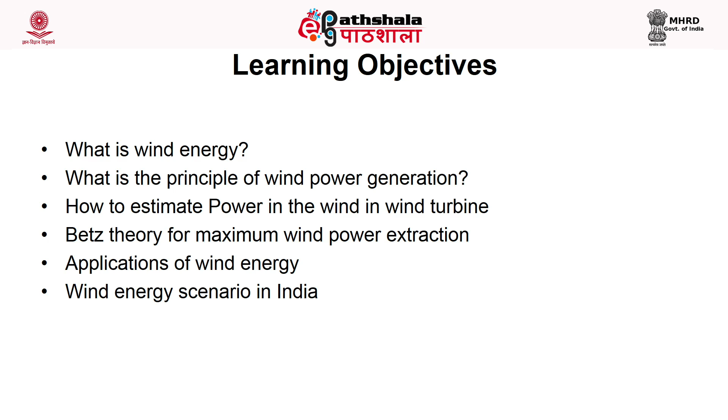So wind power is one of the indirect solar energy technologies. Wind is the air in motion resulting from the pressure gradient caused by solar radiation. About 2% of the solar radiation reaching the Earth's surface is converted to kinetic energy, and this is sufficient to meet the energy demand if we are able to harness it. The kinetic energy of the wind is utilized directly or can be converted.

The factors affecting wind generation of an area are the nature of the terrain, degree of cloud cover, and angle of the sun. Various factors that affect the distribution of wind energy are: mountain chains channelize the air currents; hills, trees and buildings act as obstructions and change the direction of airflow; and the frictional effect of the surface determines the wind speed. This is why wind speed is quite high at the seashore, as this frictional effect is less on the smooth surface.

Climatic disturbances resulting from rain affect the wind speed. Topography of an area also matters - for example, wind can speed up when passing through narrow gaps such as mountain gaps.

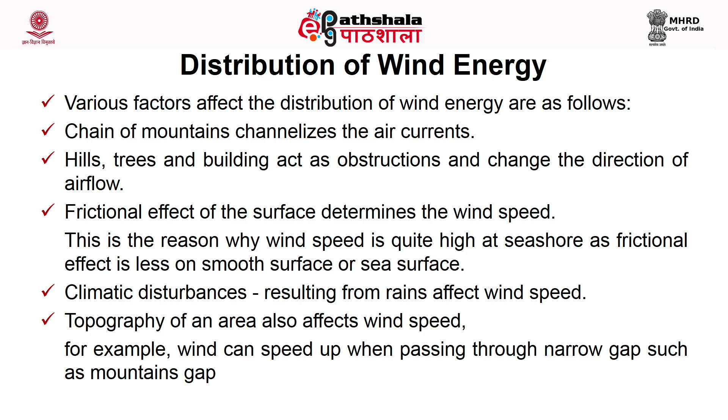Coming to the energy available in the wind: the windmill or wind system works on the principle of converting kinetic energy of the wind into mechanical energy. So we should know what is the energy available in the wind. As we all know, power is equal to energy per unit time, and the available energy can be equated to the kinetic energy of the wind.

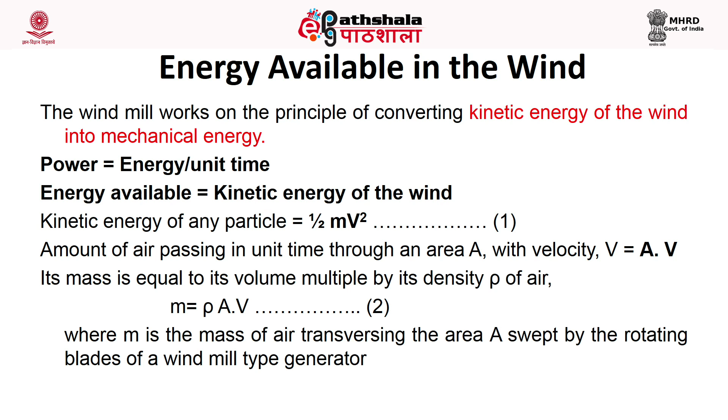Kinetic energy of any particle is equal to half mv square, where m is the mass and v is the velocity. Now the amount of air passing in unit time through an area A with velocity v can be calculated by multiplying the area with this velocity. Its mass is equal to its volume multiplied by density rho of the air, that is, density is equal to mass by volume. By applying that equation, we can equate mass as rho AV, where m is the mass of the air transversing the area A swept by the rotating blades of a windmill type generator.

Substituting this value of m in the kinetic energy equation, we get half rho A V into V square, which is equal to half rho A V cube watts.

The wind power available is proportional to air density, which is equal to 1.225 kilogram per cubic meter at sea level, and the variation in this air density over the year is around 10 to 15%. This may be because of changes in pressure and temperature.

The wind power is also proportional to the intercept area, as we have seen from the equation. So an aeroturbine with a large swept area has higher power than one with a smaller area. Since the area is normally circular of diameter d in horizontal axis aeroturbines, A can be equated as pi d squared by 4. Substituting this equation in 1 by 2 rho A V cube, we get the available wind power is equal to 1 by 8 rho pi d square V cube.

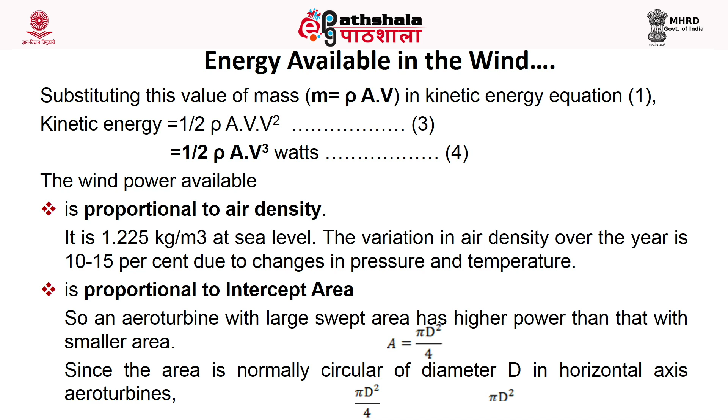Wind energy conversion system: the air circulation results from non-uniform heating of Earth's surface by the sun. The expansion of air occurs immediately above a warm area, which is forced upwards by cool, denser air that flows in from the adjacent area.

The energy in wind is due to this motion, and the energy is harnessed by a wind turbine mounted on a tower, with the speed of wind depending directly on this height. A tower height equal to or more than 30 meters is beneficial as it provides faster and less turbulent wind. The wind speed at a height of 10 meters is 20 to 25% higher than at the surface, and 30 to 60% higher at a height of 60 meters.

So, the optimum or the best height for the tower is more than 30 meters if you need to harness more energy. This is due to reduction in drag effect of the Earth's surface. The average wind speeds in a particular location need to exceed at least 6 to 8 meter per second for a small wind turbine to be economically viable. That means the optimum wind speed should be greater than 6 or 8 meter per second.

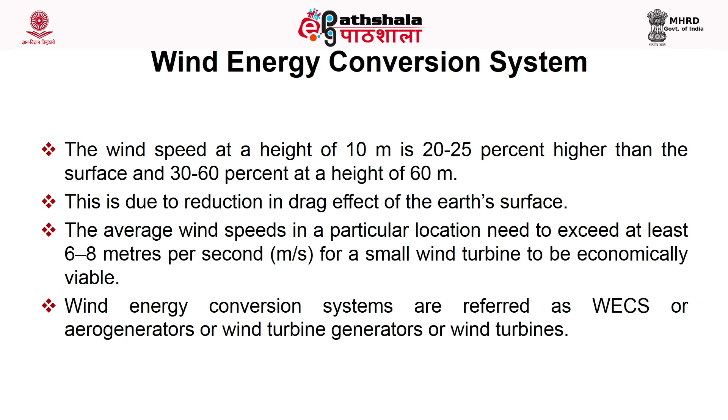The wind energy conversion system is also known as the aerogenerators, wind turbine generators, or simply wind turbines. Let's see what is the basic principle for wind energy conversion.

The basics are lift and drag forces. The extraction of power from the wind depends on creating certain forces and applying them to rotate a mechanism. There are two primary mechanisms for producing forces from the wind: lift force and drag force. The lift force acts perpendicular to the airflow while drag force acts in the direction of the flow.

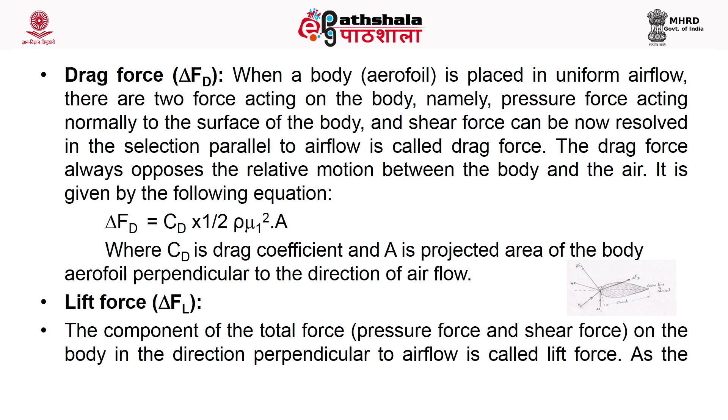Lift force is the component of the total force, that is pressure force and shear force on the body, in the direction perpendicular to airflow. This force tries to lift the body. It is given by the equation: delta FL is equal to CL, the lift coefficient, multiplied by 1 by 2 rho mu1 square A.

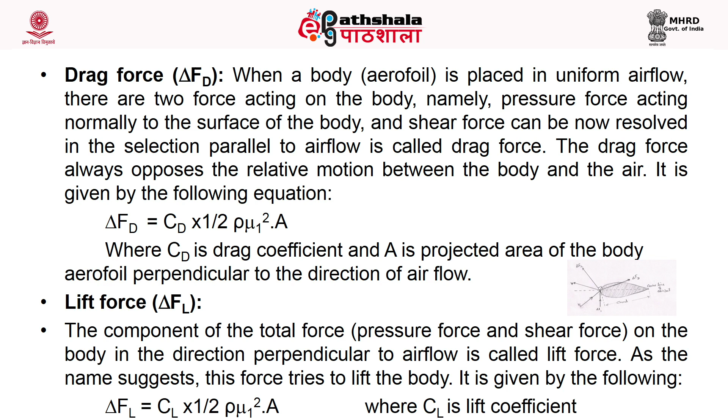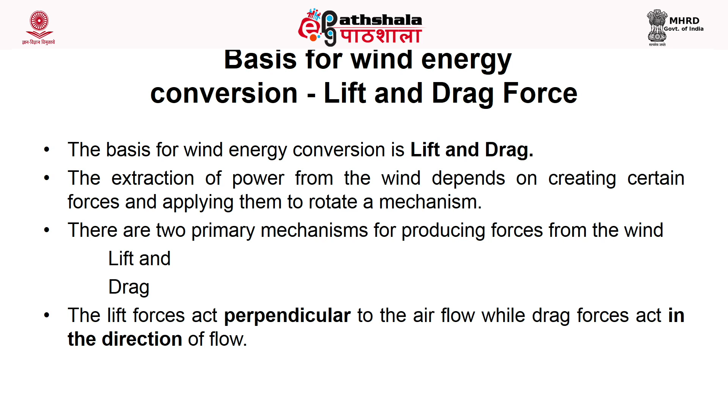Drag force: when a body or aerofoil is placed in uniform airflow, there are two forces acting on the body - pressure force acting normal to the surface, and shear force that can be resolved in the direction parallel to airflow. This is known as the drag force. It always opposes the relative motion between the body and the air, and is given by the equation delta FD is equal to CD, the drag coefficient, multiplied by 1 by 2 rho mu1 square A, where A is the projected area.

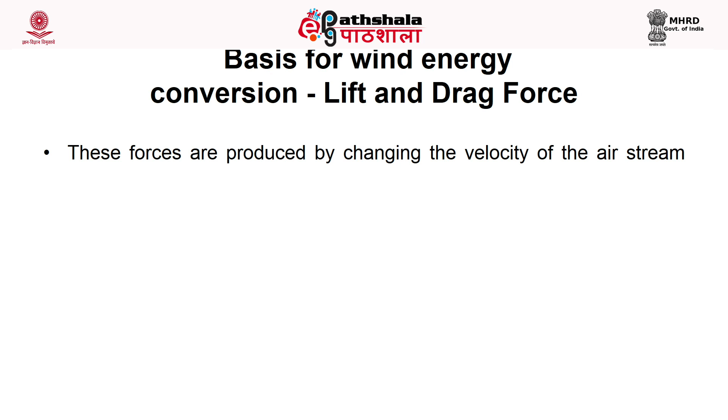These forces are produced by changing the velocity of the airstream flowing over either side of the lifting surface. Speeding up the airflow causes the pressure to drop, while slowing the airstream down leads to an increase in pressure. The change in velocity leads to a pressure difference across the lifting surface. This pressure difference produces a force that begins to act on the high pressure side and moves towards the low pressure side of the lifting surface, known as the aerofoil.

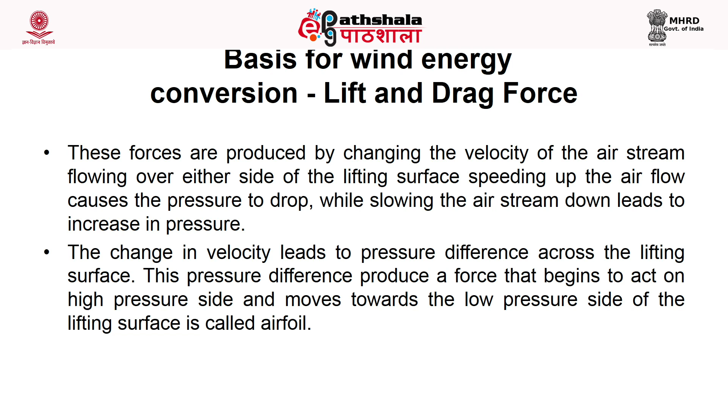Of these two forces, the lift force is good for wind energy harnessing. So what are the mechanisms for producing this lift? A good airfoil has a high lift drag ratio. The lift increases as the angle formed at the junction of the airfoil and the airstream becomes less acute, up to the point where the angle of airflow on the low pressure side becomes excessive. Due to turbulence, the lift decreases and drag force increases substantially - this is known as stalling.

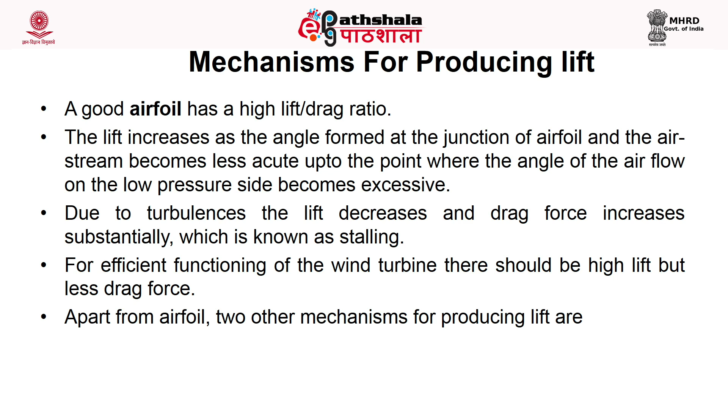For efficient functioning of the wind turbine, there should be high lift but less drag force. Apart from the airfoil, the two other mechanisms for producing lift are the Magnus effect and the Thwaites slot.

The Magnus effect is caused by spinning a cylinder in an airstream. The spinning slows down the airspeed on the side where the cylinder is moving into the wind, and increases it on the other side.

Air is blown through narrow slots in a cylinder and emerges tangentially - this is known as the Thwaites slot. This creates rotation of airflow, which in turn generates lift. So these are the mechanisms which help in production of lift force.

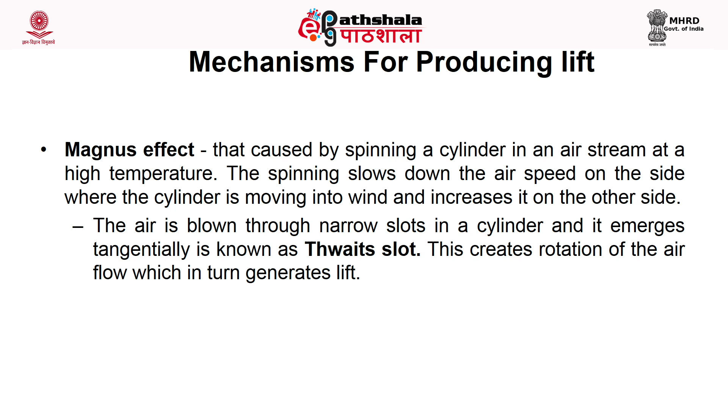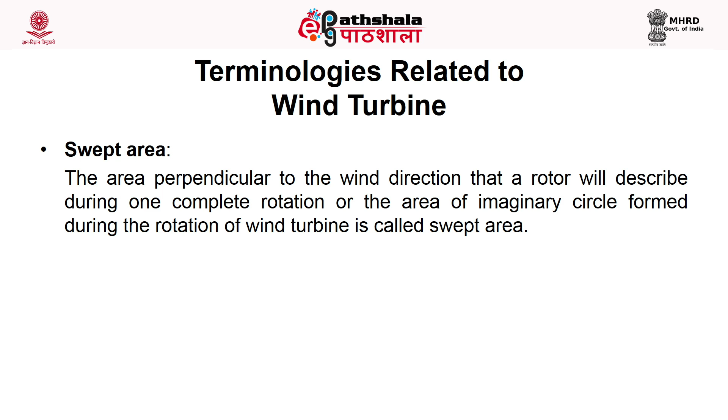Coming to the different terminologies related to wind turbines before seeing the principle behind it: Swept area is the area perpendicular to wind direction that a rotor will describe during one complete rotation, or the area of the imaginary circle formed during the rotation of the wind turbine.

There are different wind velocities. Wind velocity is the velocity of the free air stream at a sufficient distance away from the wind turbine, where there is no disturbance due to rotation of the wind turbine. Incident wind velocity is the velocity at which wind strikes the blade, and this velocity is always slightly lower than the free airstream velocity, mu0. The incident wind velocity is mu1.

Blade linear velocity is the velocity of the blade due to its rotation. If omega is the angular velocity of the blade and r is the length of the blade, then blade linear velocity is equal to omega multiplied by r.

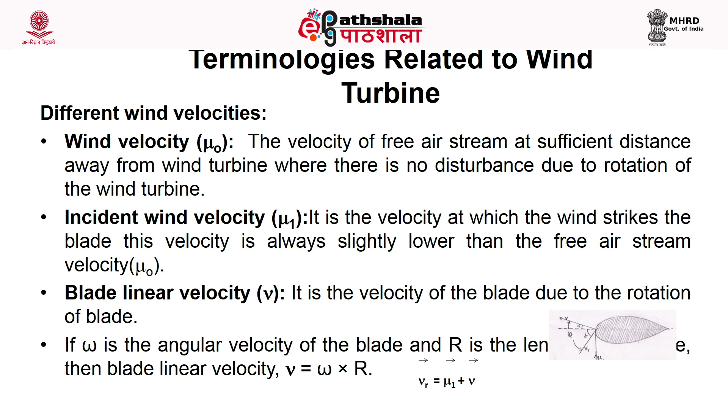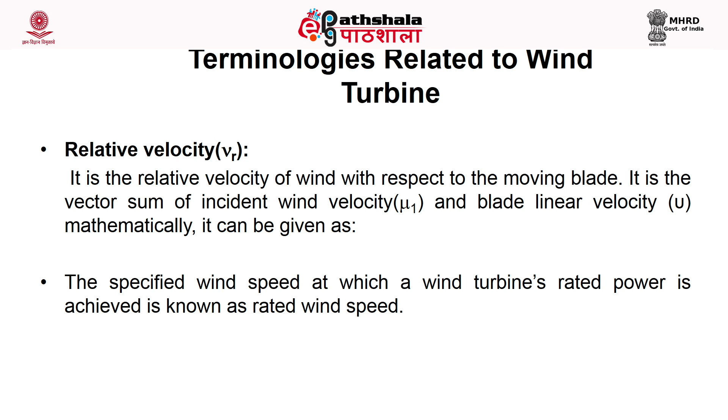Relative velocity is the relative velocity of wind with respect to the moving blade. It is a vector sum of incident wind velocity mu1 and blade linear velocity, as given by the mathematical representation here. The specified wind speed at which a wind turbine's rated power is achieved is known as the rated wind speed.

Survival wind speed or extreme wind speed is the maximum wind speed that a wind turbine is designed to withstand. You can see different velocities in this picture.

The angle of attack or angle of incidence, denoted by alpha, is the angle between the center line of the aerofoil, that is the blade cross section, and the relative velocity nu r. The airflow remains attached to the aerofoil for a small angle of attack, and the airflow is separated from the aerofoil for a large angle of attack.

The pitch angle or blade setting angle, denoted by gamma, is the angle between the center line of the aerofoil and the direction of linear motion of the blade. The output of a turbine is greatly influenced by blade pitch angle. The blade pitch control is a very effective way to control the output power, speed or torque of the turbine.

We have already seen the lift force and the drag force. There are other forces also, like axial force. The total force, that is the pressure force and shear force, can also be resolved along the axis of rotation of the blade and perpendicular to it.

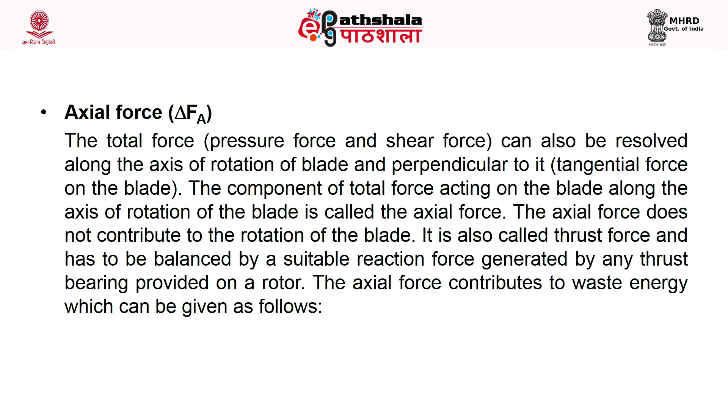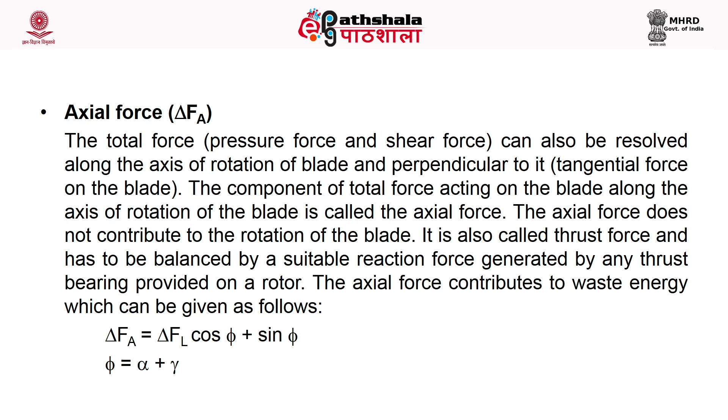The component of total force acting on the blade along the axis of rotation of the blade is called the axial force. The axial force does not contribute to the rotation of the blade. It is also called the thrust force and has to be balanced by a suitable reaction force generated by any thrust bearing provided on a rotor. The axial force contributes to waste energy.

It is represented as delta Fa, which is equal to delta Fl cos phi plus delta Fd sin phi, where the angle phi is equal to alpha plus gamma.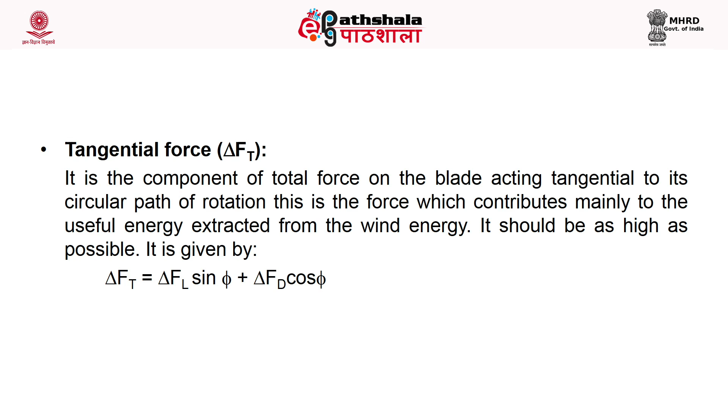The tangential force is the component of total force on the blade acting tangential to its circular path of rotation. This is the force which contributes mainly to the useful energy extracted from the wind energy, and it should be as high as possible. It is given by the equation delta Ft is equal to delta Fl sin phi plus delta Fd cos phi.

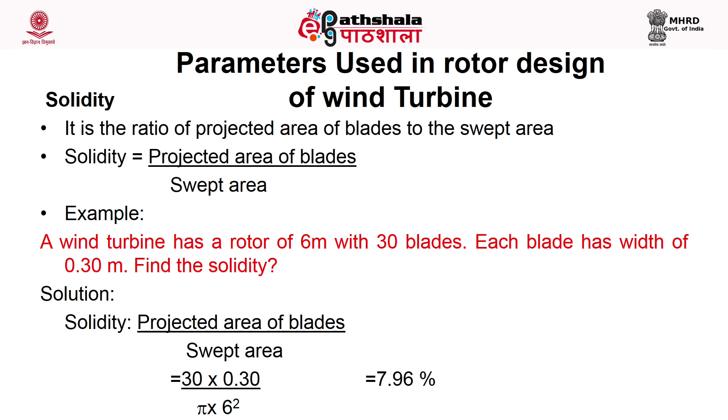The rotor of the wind turbine collects the wind from all areas swept by the rotor. The area swept can be considered as an airstream tube, which is continuously expanding air. This airstream model is also known as the Betz model of expanding air.

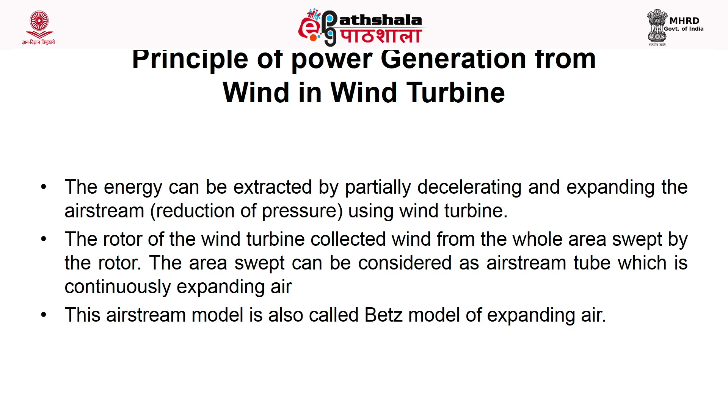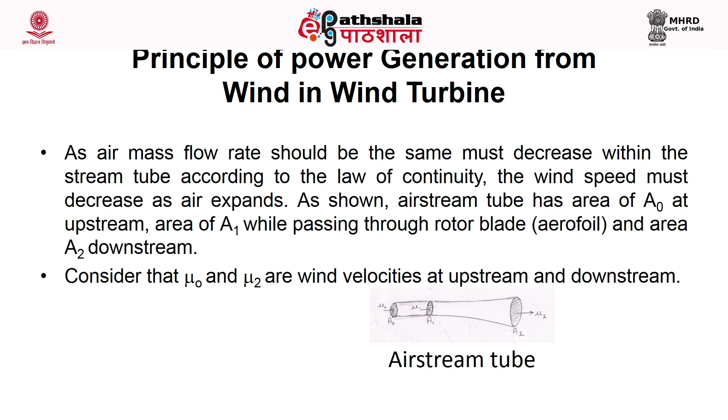Considering that mu0 and mu2 are the wind velocities at upstream and downstream, the velocity reduction from mu0 to mu2 means that there is reduction in momentum of wind as it passes through the wind turbine, resulting in a force being exerted on the blade of the rotor. It is given by the equation force F is equal to m into mu0 minus m into mu2, which can be written as F is equal to m into mu0 minus mu2, where m is the mass flow per unit time through the stream tube.

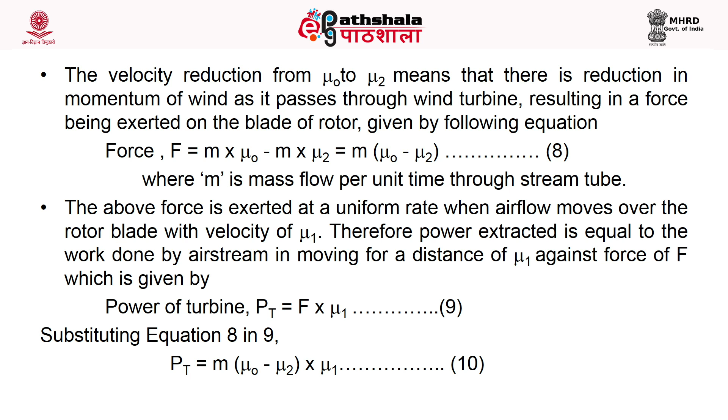The above force is exerted at a uniform rate when airflow moves over the rotor blade with velocity of nu1. Therefore, power extracted is equal to the work done by the airstream in moving for a distance of nu1 against force F, and it can be given by power of turbine Pt is equal to F into nu1.

Now substitute the F value, that is m into nu0 minus nu2, in this equation number 9. We will get Pt is equal to m into nu0 minus nu2 into nu1.

The power extracted by the wind turbine from the wind is equal to the change or loss of kinetic energy of the wind. So delta Ke is equal to Pw, which is equal to half of m into nu0 square minus nu2 square.

The energy extracted is equal to energy lost by wind. So the extracted is Pt and the lost is Pw. Equating these two values, Pt and Pw, we get m into nu0 minus nu2 multiplied by nu1 is equal to half into m into nu0 square minus nu2 square.

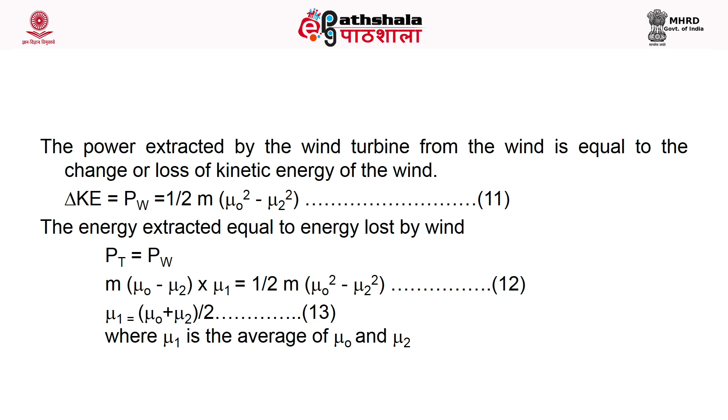From this we can calculate nu1 is equal to nu0 plus nu2 by 2, where nu1 is the average of nu0 and nu2. Substituting this value in Pt, we get Pt is equal to m into nu0 minus nu2 multiplied by nu0 plus nu2 by 2, which is half of m into nu0 square minus nu2 square.

The mass flow m is the product of area, velocity and density, represented as A1 into nu1 into rho, using the already calculated value of nu1. Substituting, we get m is equal to A1 into nu0 plus nu2 by 2 into rho. Now substitute this Pt value of half m into nu0 square minus nu2 square, and the m value A1 into nu0 plus nu2 by 2 into rho.

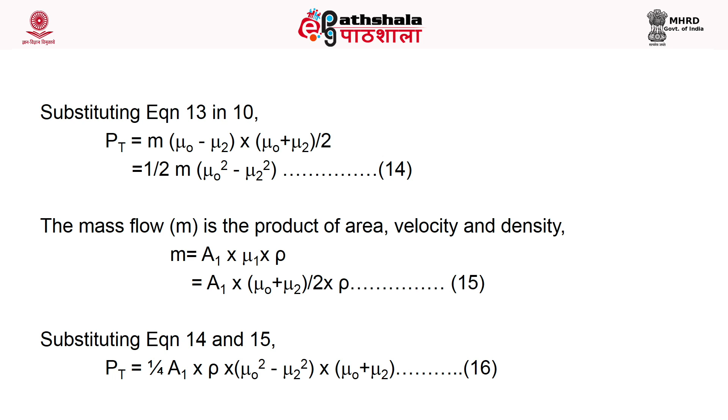We get Pt is equal to 1 by 4 into A1 into rho into nu0 square minus nu2 square, multiplied by nu0 plus nu2.

Let's assume there is an interference factor alpha present, then nu1 is equal to 1 minus alpha into nu0. So alpha is equal to 1 minus nu1 by nu0, which is equal to 1 minus nu0 plus nu2 by 2, divided by nu0.

So alpha is equal to nu0 minus nu2 by 2, multiplied by nu0. Therefore nu2 is equal to 1 minus 2 alpha into nu0.

Now with the interference factor alpha present, the turbine power Pt is equal to 1 by 4 A1 into rho into 2 into alpha into nu0 multiplied by nu0 plus 1 minus 2 alpha nu0 all square, which is equal to 4 into alpha into 1 minus alpha all square multiplied by 1 by 2 rho A1 nu0 cube.

And the wind power is given by Pw is equal to 1 by 2 rho A1 nu0 cube. Substituting m, we get A1 multiplied by nu0 plus nu2 by 2 into rho.

From these equations, we have Pt is equal to 4 into alpha multiplied by 1 minus alpha square, multiplied by Pw. This value, 4 into alpha multiplied by 1 minus alpha all square, is represented as Cp, the power coefficient. So Pt is equal to Cp, the power coefficient, multiplied by Pw.

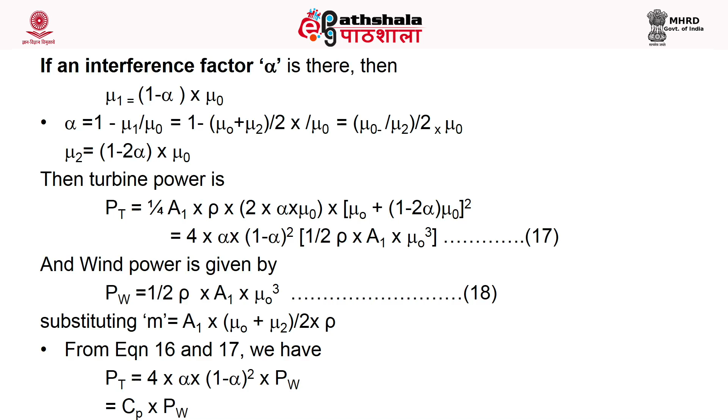The power coefficient Cp indicates the portion or fraction of wind power extracted by the wind turbine. The ideal or maximum theoretical efficiency, eta max, of a wind turbine is also known as the power coefficient. It is the ratio of maximum power obtained from the wind to the total power available in the wind, or the ratio of actual power to theoretical power.

The power coefficient can be calculated by the power output from the wind machine divided by the power available in the wind, that is, P actual divided by P theoretical.

When alpha is equal to 0, then nu1 is equal to nu0, nu2 is equal to nu0, and no power generation takes place. That means if there is no interference, or the alpha value is 0, then there is no power generation.

When alpha is 1 by 3, then nu1 is equal to 2 by 3 nu0, and nu2 is equal to 1 by 3 nu0, and the maximum power generation takes place.

When alpha is 1 by 2, then nu1 is equal to 1 by 2 nu0, nu2 is equal to 0, and only turbulence occurs at the downstream.

When alpha is equal to 1, it results in the stalling of the turbine. That means when alpha is equal to 1, stalling occurs.

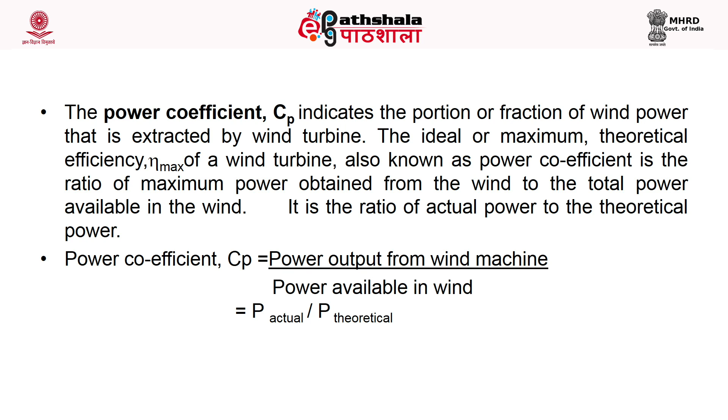Let us see the theoretical maximum wind power that can be produced by the wind turbine. The air density is proportional to the air temperature and air pressure, both of which vary with height above sea level. The power in the wind cannot be completely converted to mechanical energy of a wind turbine; losses due to friction reduce the actual wind power.

The theoretical maximum of energy extraction from wind was calculated by Betz in 1926, and this theory is known as the Betz theory. The power output from the wind turbine is given as Pt is equal to 1 by 4 A1 rho multiplied by nu0 square minus nu2 square, into nu0 plus nu2.

The power output depends on outlet velocity nu 2, hence for the maximum output dPt by d nu 2 is equal to 0. And so, nu 2 is equal to minus nu 0, which is impossible, and nu 2 is equal to nu 0 by 3.

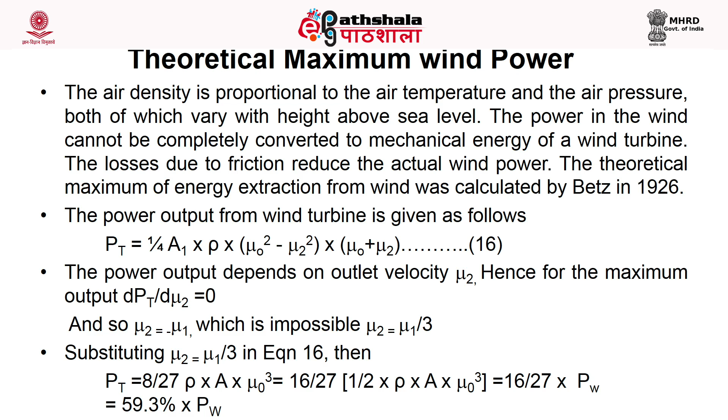Substituting mu 2 is equal to mu 1 by 3 in this equation of Pt, we will get Pt is equal to 8 by 27 rho multiplied by A into mu 0 cube, which is equal to 16 by 27 multiplied by Pw, and which is 59.3% of the Pw.

As per Betz's theory, a wind turbine is able to utilize only 59% of the wind power even if no losses have occurred, so the power is multiplied by a factor of 0.59 to get the actual value. When some unavoidable losses occur, the turbine is able to utilize only 42%, and the value reduces from 0.59 to 0.42.

There are some parameters which should be considered while designing the rotor of a wind turbine. One is solidity. It is the ratio of projected area of blades to the swept area. So, you can calculate solidity by dividing projected area of blades by the swept area.

Let us do an example. A wind turbine has a rotor of 6 meter with 30 blades. Each blade has a width of 0.3 meter. What is the solidity? Solidity is projected area of blades divided by swept area. 30 is the number of blades and the width is 0.3, so multiply 30 by 0.3 to get the projected area of blades.

The swept area is calculated using the rotor of 6 meter, so pi r square, that is pi into 6 square. Applying 30 into 0.3 divided by pi into 6 square, we will get 7.96%. So, that is the solidity.

Greater the solidity of a rotor, the slower it needs to turn to intercept the wind. When a wind wheel has a lesser number of blades, it needs to rotate fast to intercept the wind, so that wind should not be lost through the large gap existing between two blades without imparting a part of wind power. So, solidity is important in designing the rotor.

Another parameter is the tip speed ratio, denoted as lambda. It is defined as the ratio of the speed of the tip of the rotor blade to the speed of the coming air, that is tip speed of the blade divided by wind speed, which is equal to omega multiplied by r, divided by nu 0, where omega is the rotational speed of the rotor, normally expressed in radians per second, r is the radius of the rotor in meter, and nu 0 is the wind velocity in meter per second. So, the tip speed ratio is omega r divided by nu 0.

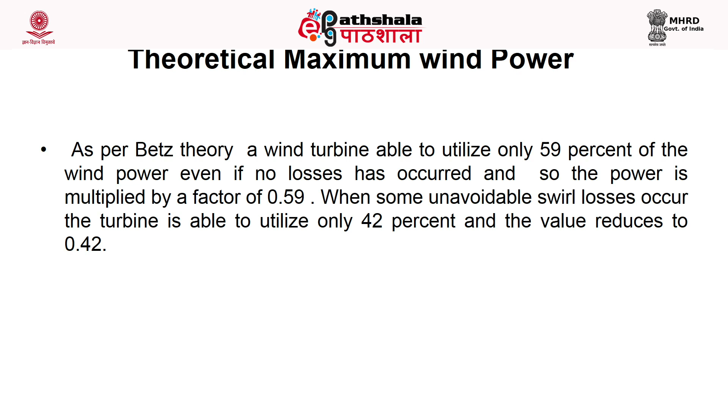Another factor is the overall conversion efficiency of the rotor, transmission system and generator or pump. The various components of the wind turbine affect the output.

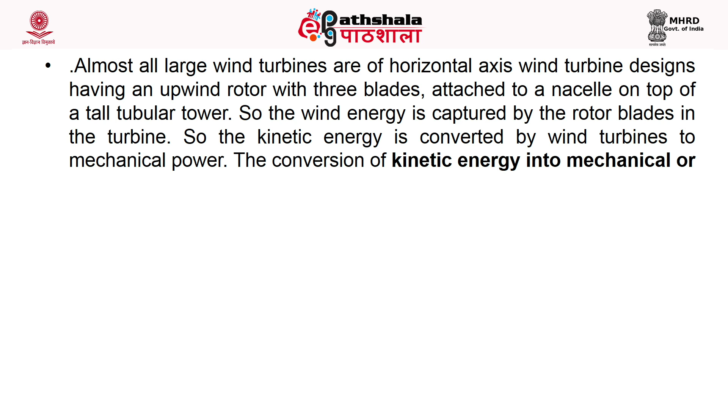Almost all large wind turbines are of horizontal axis wind turbine design, having an upwind rotor with 3 blades attached to a nacelle on top of a tall tubular tower. The wind energy is captured by the rotor blades in the turbine, and the kinetic energy is converted by the wind turbines into mechanical power.

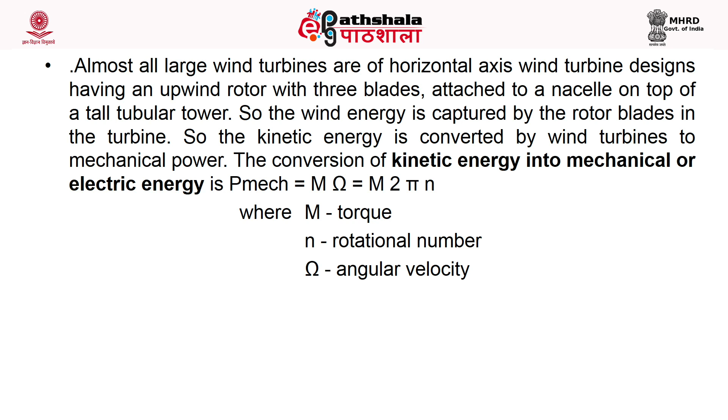The conversion of kinetic energy into mechanical or electrical energy is given as Pmech equals m omega, which equals m times 2 pi n, where m is torque, n is rotational number, and omega is angular velocity. This gives the mechanical power in the rotation of the blade.

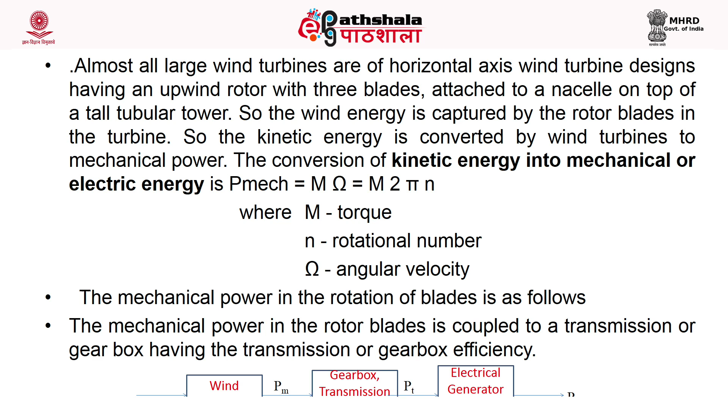The mechanical power in the rotor blade is coupled to a transmission or gearbox, which has its own transmission or gearbox efficiency, as shown in this figure.

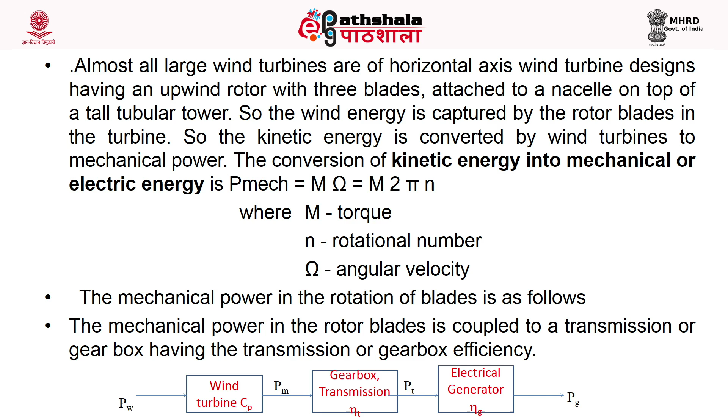The optimization of wind turbine designs to suit different wind conditions includes the use of a variable pitch control system, yaw control, large size blades, variable speed drive, tilt control of blades, stall control by shifting of blades, eddy current braking systems to maintain speed, and power electronics. These can also increase the efficiency of a wind turbine.

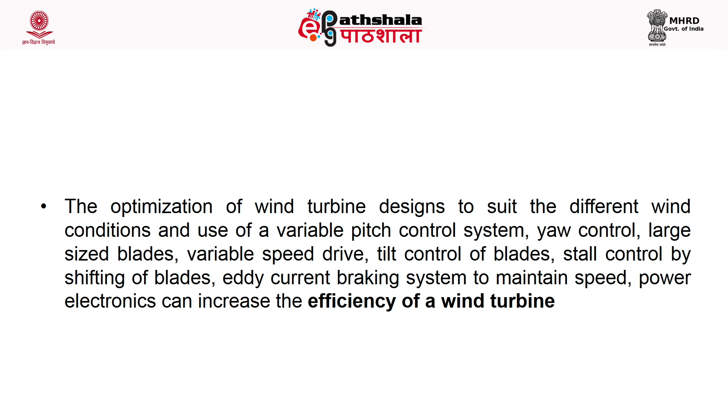Now we will see the selection criteria for wind turbine sites. There should be high annual mean wind speed. This is the basic requirement for successful use of a wind farm or windmill, which requires an adequate supply of wind with good wind speeds, as wind power is proportional to the cubic power of wind speed.

There should not be any obstruction, such as any high structure obstructing wind for a distance of 3 km. The site should be an open plain, such as an open seashore line, or located on a hill or ridge with a gentle slope, whether onshore or offshore. Since wind speed increases with height, this benefit can be obtained when the windmill is located on a hill or ridge with a gentle slope.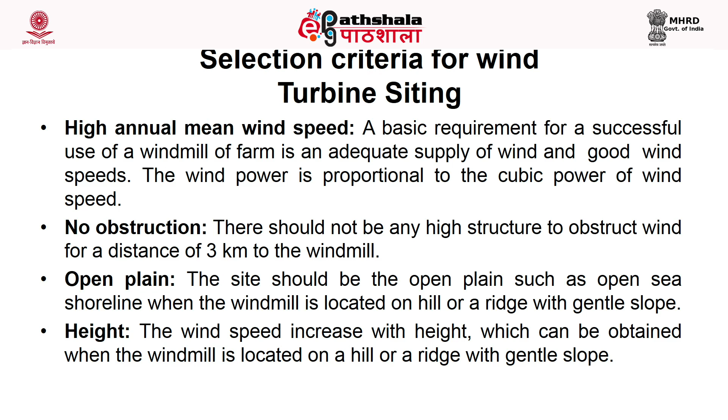So we need not spend too much on the tower; we need a tower but not too high. Being near a lake or the ocean is one of the good criteria or potential areas for wind turbines, since the differential heating of water and land generates wind of sufficient speed. So we will have wind with optimum speed in those areas.

Another factor is topography. Normally, a mountain gap helps to channelize and speed up the wind, so areas having such features should be encouraged.

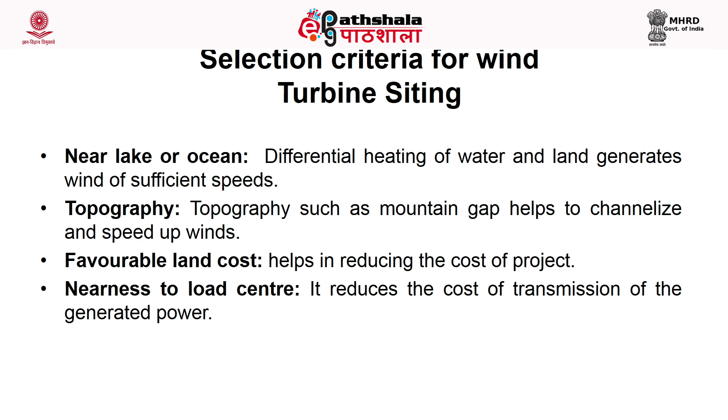Favorable land cost is important for the cost of the project. The site should be near the load center, which reduces the cost of transmission, and near a road or rail link, which helps in installation. The availability of wind data for the site will also help in designing the wind turbine.

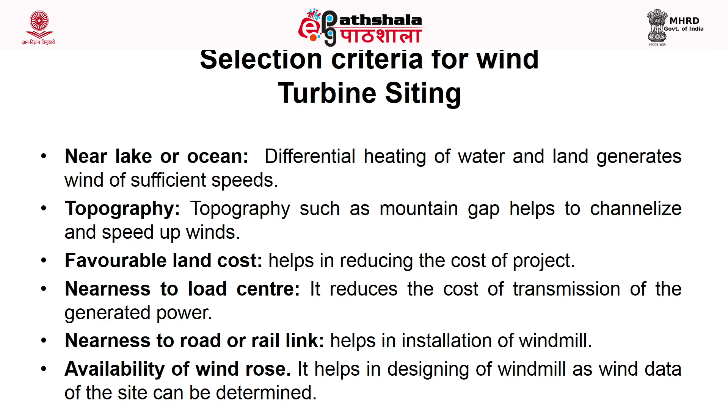The benefits of wind energy: it is a potential energy source especially in rural areas where electricity is not accessible. Energy production is high from a suitable wind turbine design, and it is mainly used for electricity production. It has low maintenance cost, is a clean fuel, pollution free, and eco-friendly.

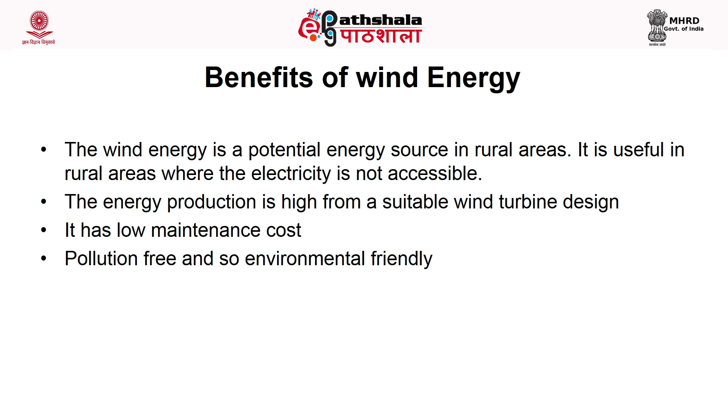Its applications include two types of small scale wind turbines utilized in domestic, community and wind energy projects. The power generated by wind turbines is connected to the grid, either state or central. The first windmill used for production of electric power was built in Scotland in 1887 by Professor James Blyth of Anderson's College.

So we have two types of wind energy systems produced for electricity usage. One is the standalone system, used for electricity production for battery charging, running small electrical appliances mainly in remote areas with no power supply. It helps with water heating or pumping, electric livestock fencing, lighting, or any small electronic system needed to control or monitor remote equipment. So standalone systems are mainly for small applications.

Now, the other type is the grid connected small wind turbines.

Here the output from the wind turbine is directly connected to the existing mains electricity supply, so it's grid connected. This type of system can be used both for individual wind turbines and for wind farms which export the electricity to the electricity network. The group of wind turbines located in the same place for electricity generation is known as a wind farm.

It is also known as the wind power plant, and it varies in capacity from a few megawatts to hundreds of megawatts. A large wind farm may consist of several hundred individual wind turbines distributed over an extended area, but the land between the turbines can also be used for agriculture or other purposes.

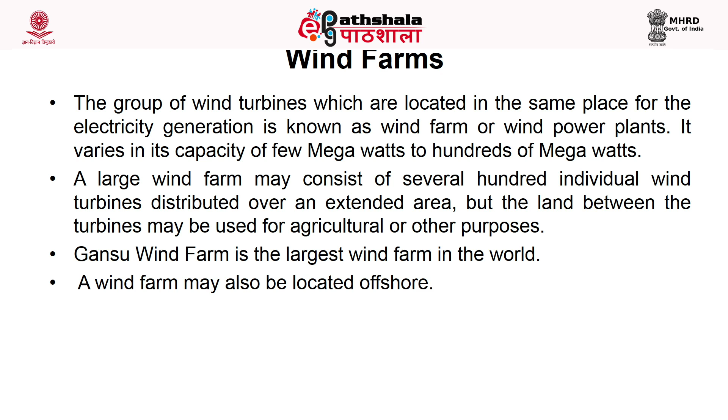But wind energy has some limitations, especially that it is erratic in nature, unsteady and not reliable, as it varies over places and time. So depending on wind is possible only in those areas having an optimum wind speed capable of running the turbine, otherwise it is not cost effective.

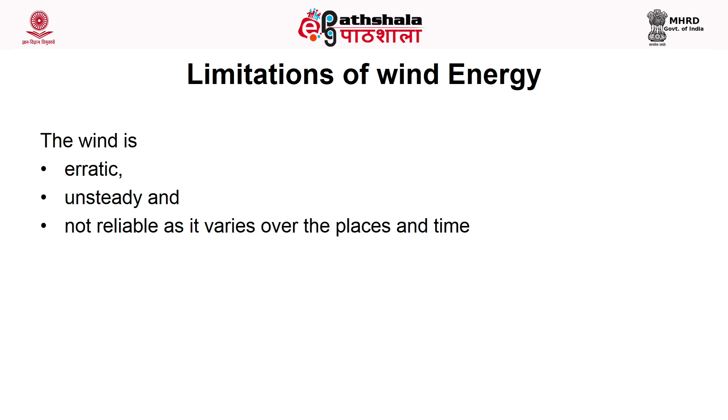Let us see the wind energy scenario in India. The world leader of wind energy is China, followed by US and Germany, and we are in the 4th position by installation, wind energy installations till March 2017. We have already installed 31 gigawatts, accounting for around 6.6% of the global market. The wind energy potential in India is estimated to be 2.5 into 10 to the power 4 megawatt.

We have a Center for Wind Energy Technology, that is CWET of MNRE, located in Chennai, which is responsible for wind resource assessment in the country. That includes R&D, technology upgrading, testing, certification, standardization in close association with the wind turbine industry. The government has started wind energy demonstration programs with installations of wind pumps, wind battery chargers, standalone wind electric generators and wind farms.

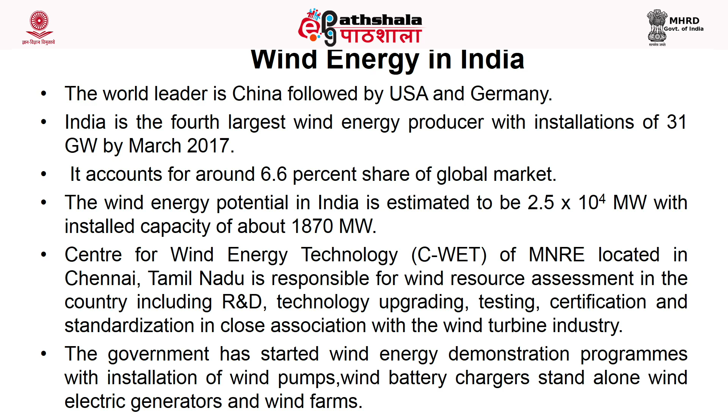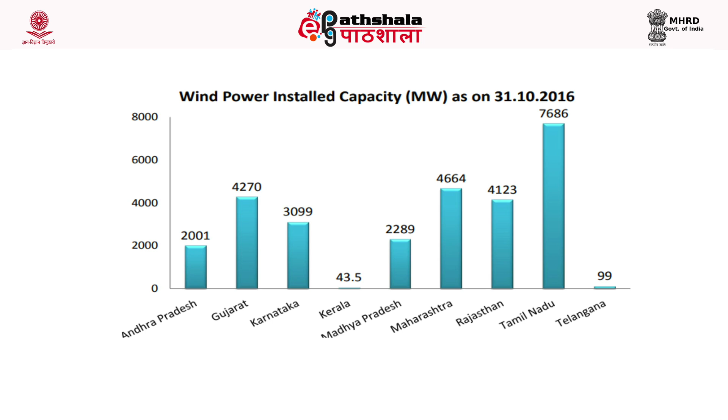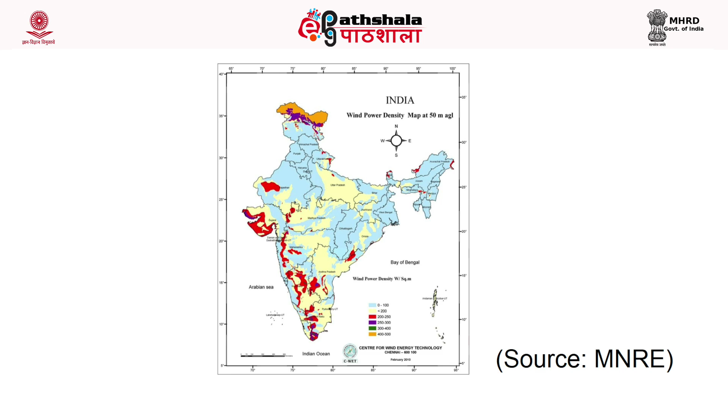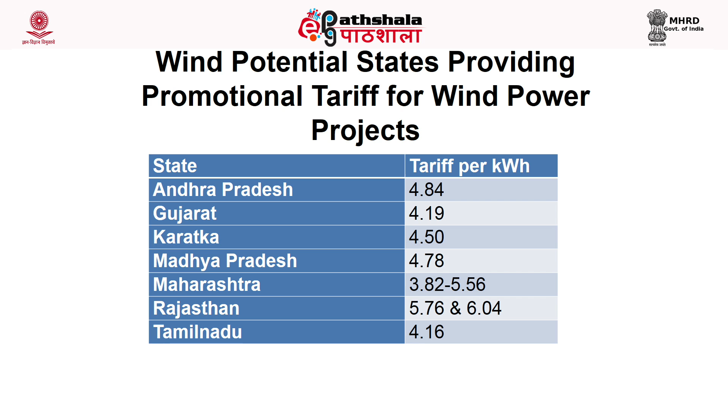This map shows the wind resources in different states of India, and these are the major windy states in India, as per the installed capacity of wind power. Tamil Nadu has the highest, followed by Maharashtra and Gujarat, though the potential is highest in Gujarat. This table shows the wind potential states, and they are providing some promotional tariffs for the wind power projects.

To conclude, we have seen that wind is not constant over different areas; it changes. So the wind generated and distributed depends on different factors, and the energy available in the wind is calculated as 1 by 8 pi d squared v cube. This energy is directly proportional to the cube of the velocity and the square of the diameter of the rotor or windmill.

If we increase the wind velocity by 2 times, the power is increased by 8 times. We have seen that the optimum or minimum wind speed for the wind turbine should be 6 to 8 meters per second, and it should be placed at a height of 30 meters and above. Then only efficient harnessing of wind power is possible.

We have seen different terminologies associated with wind turbines, and the principle behind wind energy generation from the wind turbine. The Betz theory says that only 59% of the total energy can be harnessed by the wind turbine if there are no other hindrances present. We have also seen different factors influencing the output of wind energy from this wind energy conversion system.